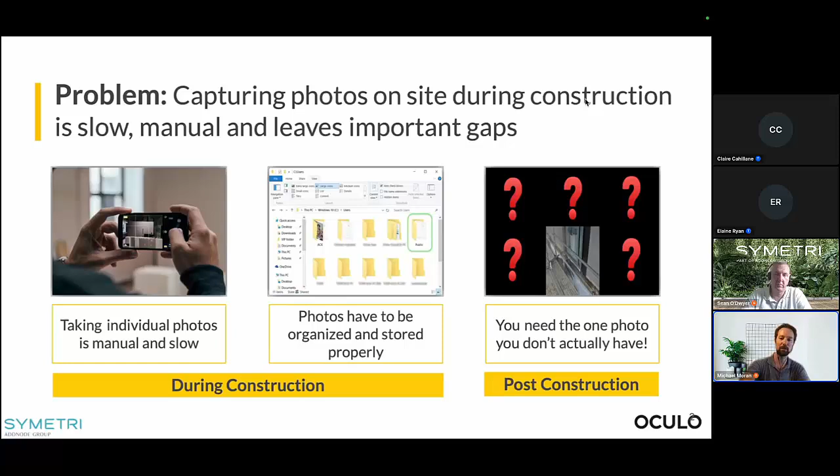So what is Oculo? It's a very, very simple solution that allows you to capture 100% of your site visually. As a result of that, you can do all sorts of things in terms of analyzing progress, comparing to models, comparing past scenes with the current, and really getting an up-to-date, accurate view of what's happening on your construction site at any particular time. There are 3 steps to the process.

As I said, very simple. Step 1 is you take a 360 camera, mount it to a helmet or on the end of a selfie stick, and press record. Start the video, walk the site as you would normally when doing an inspection. You can walk on all levels, all floors, all areas. With a single recording, you capture the entire site. You upload that video recording into Oculo, and we do the rest.

So we're using AI to process the video recording in full 3D coordinates and map that against your floor plans or your models, and we recreate the walk in 3D. It's essentially like a Google Street View for your construction site, for every day that you walk. The result is full 360 coverage that allows you to really easily pull up a floor plan and jump into a view of any area at any given time.

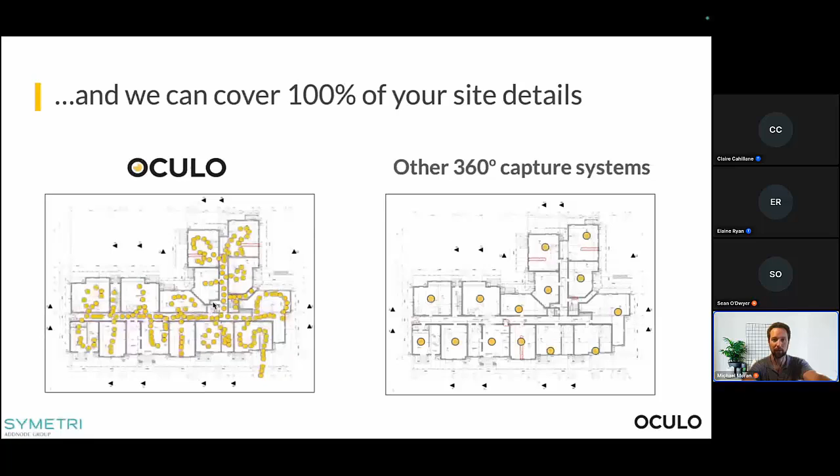The result of that is that we capture 100% of where you walk on site. There are other reality capture systems that involve setting up a camera, tripod, or scanner at various points and then registering where you were at that time. With Oculo, that goes away, and you have step-by-step for every level and every area of the project.

And the results of this are, and we'll go into this in more detail after a live demonstration, a full visual history of your entire building, complete 360 photo evidence with no gaps, so you don't need to take hundreds of manual photos and tag them by location. Instead you have this comprehensive view of everything that was seen on site on the day that you walk.

You have the ability, if you're using 3D models on projects, to compare those against the as-built reality situation. We'll see how that looks in a moment. The result of this is saving a lot of time, costs, headaches, and reducing risk on projects.

Having that accurate view means you can accurately defend your company in the case of disputes, or even if it goes to court in the case of claims. If there are variations or change orders, you can very easily see what was happening at any given time.

You have a very objective view of progress, which means that for valuations, for example, payments to subcontractors or proving that work was done at a particular time, there's no discussion anymore. You can just go and see exactly what was installed at a particular date.

It also means you can save on travel time, either from the site office to the site, which on a large site can be significant, or even in the case of consultants who are remotely located, or staff members in a different city or country. They can log in and see the latest information on site just by accessing a browser and viewing the latest Oculo scans.

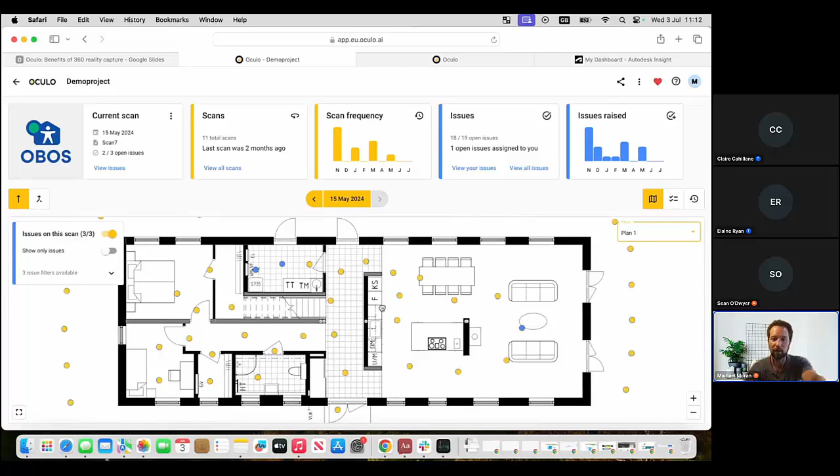So this is a landing page for a sample project in Oculo. What I see here is a floor plan view of a project, and each of these dots represents a step on the latest date that was captured. So each of these yellow dots represents where the person who did the capture walked.

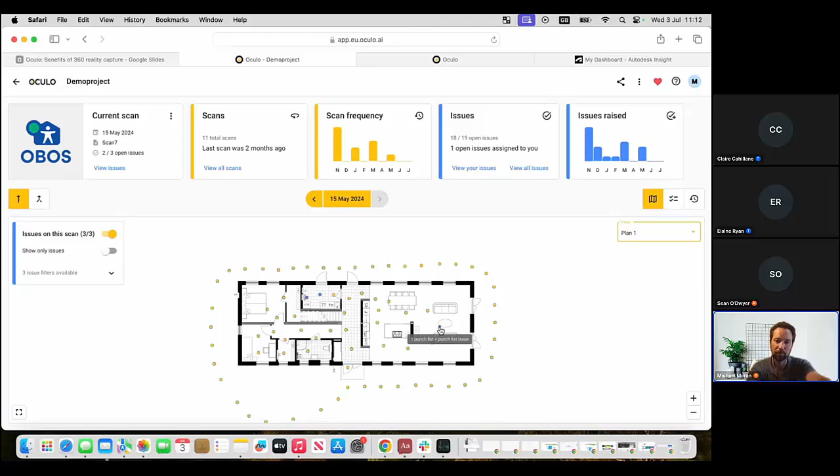They walked outside the building, they walked inside the building, they walked on multiple levels, and I can go into any of these locations and immediately get a full 360 Google Street View style capture of the project on that day.

I can easily navigate around, and I can navigate around on the little mini map here. You'll notice that anytime we recognize a person, a human figure in these scans, they're automatically blurred for privacy protection.

It's a very easy navigation and viewing process. So in addition to being very easy to do these captures out on site using the camera, it's also easy for anyone back in the office to use. There's no extra special training needed in order to use Oculo.

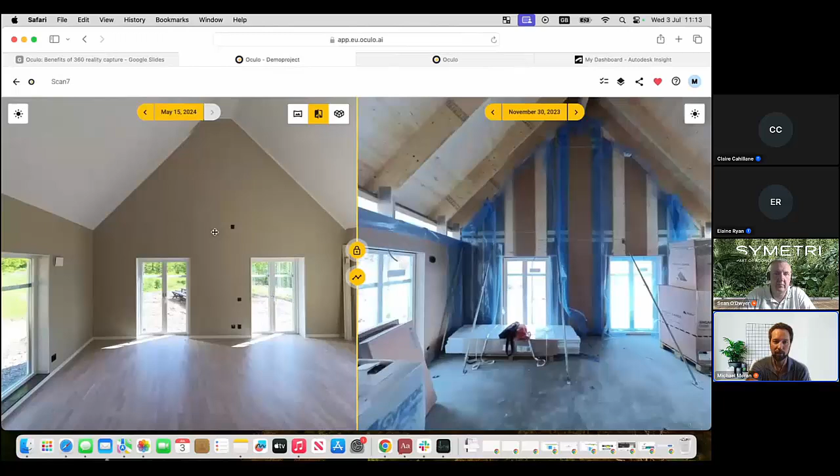As we mentioned, we have the ability to automatically locate all of these 360 scenes on a plan. What that means is that we can also automatically compare to any previous scenes that were captured at previous dates on the project.

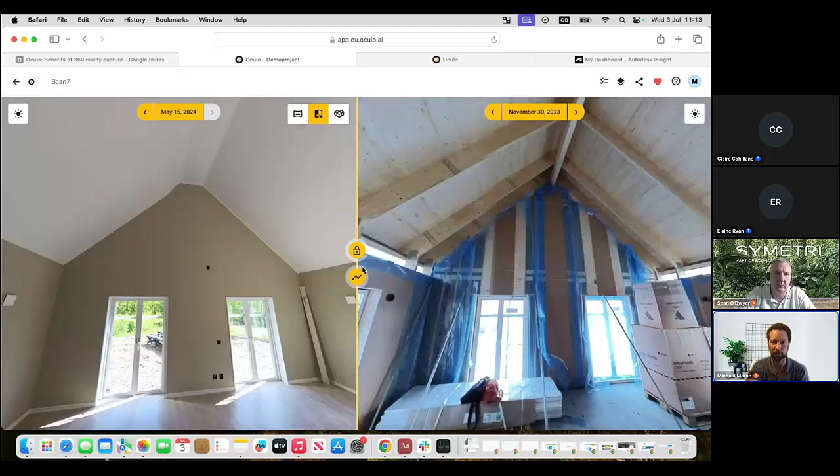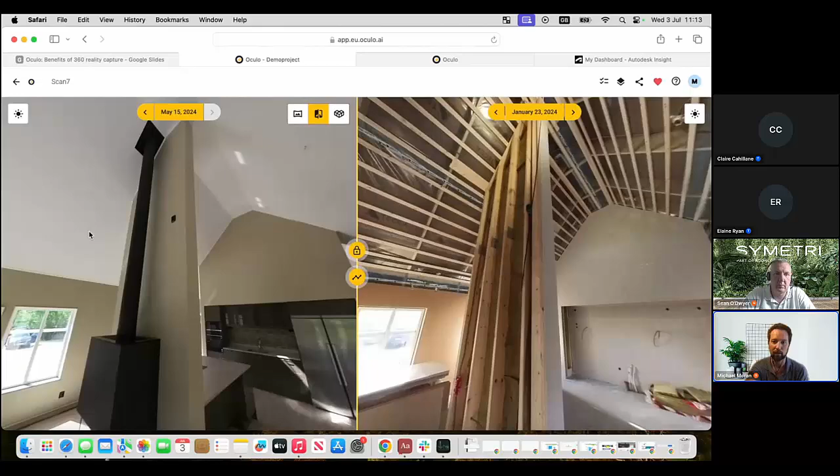So I have this full timeline showing me exactly what was happening at the project at any of these given times. On a typical project, this might be weekly or a couple times a week, and I can peel back these layers and see exactly the status of the work that was being done at this location at that time.

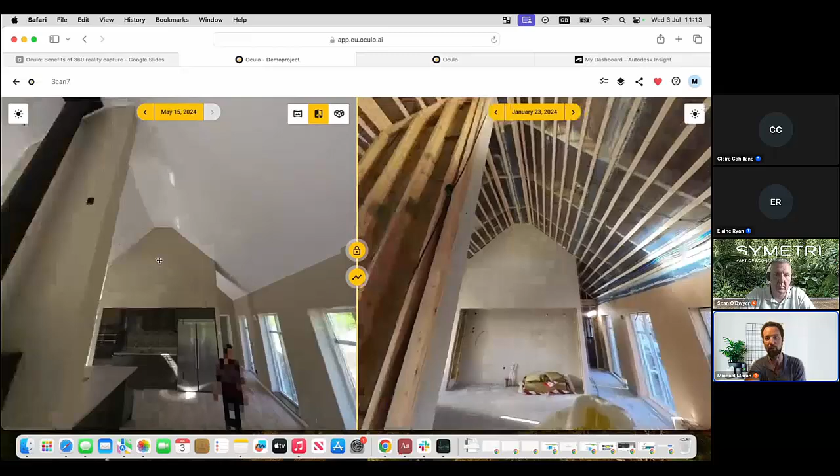And it's going to move in and keep me locked on that position. So I can look behind walls, I can verify what work was done, and you very easily see conditions at that time.

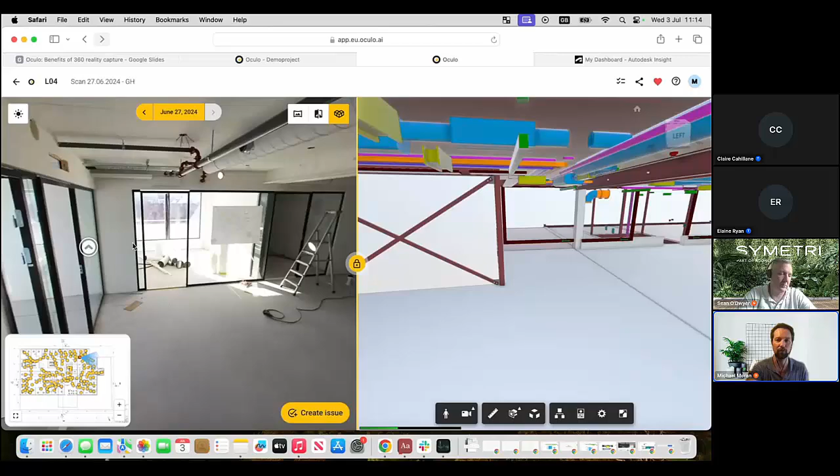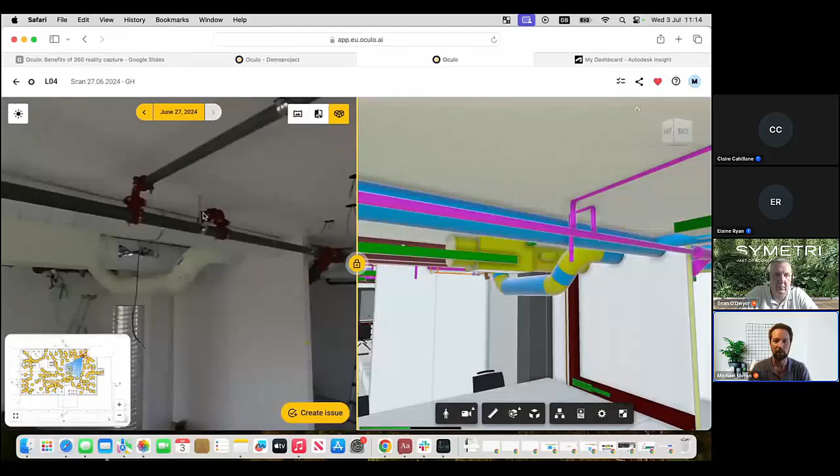As mentioned, we don't require a 3D model in order to use Oculo, but if you do have a 3D model, you have the ability to also compare all of these positions in your 360 as-built view against the latest design model. We embed the Autodesk viewer here, which allows us to very easily compare the as-built reality versus the design.

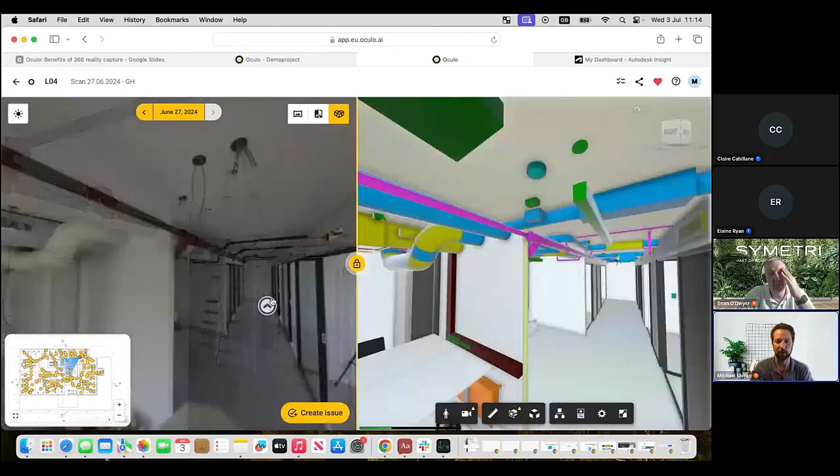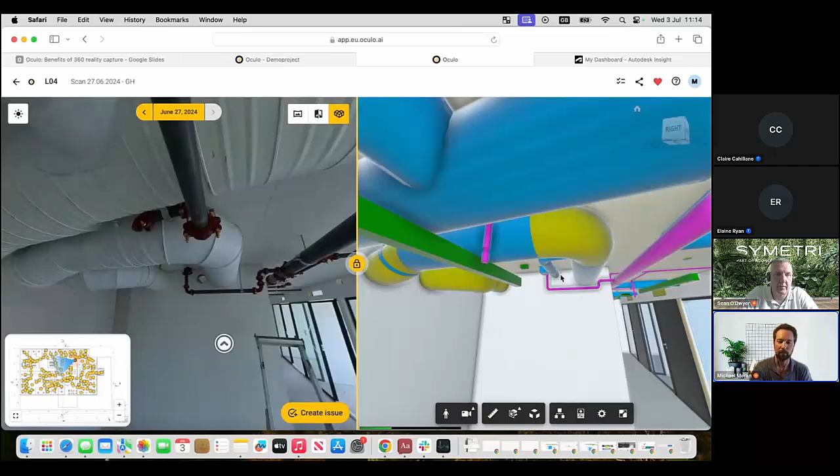Many people say this is the easiest way to give the full team access to the latest model information. You'll see that it moves and updates as I move through the space in 3D or in 360. And because this is the Autodesk viewer, I can select objects here.

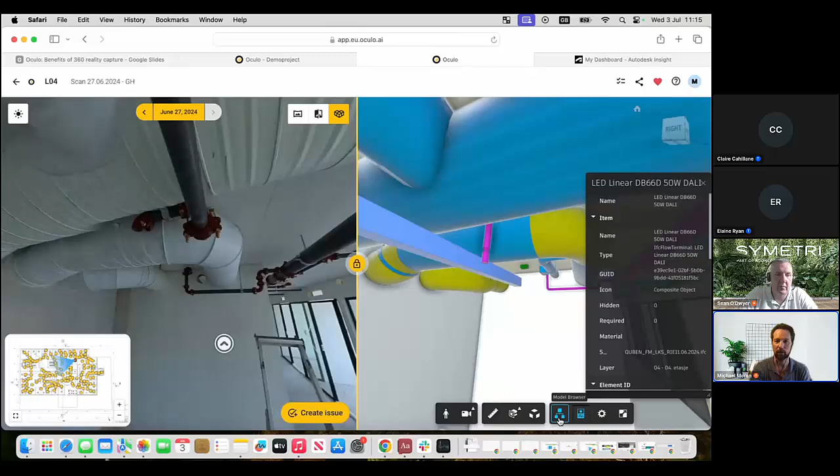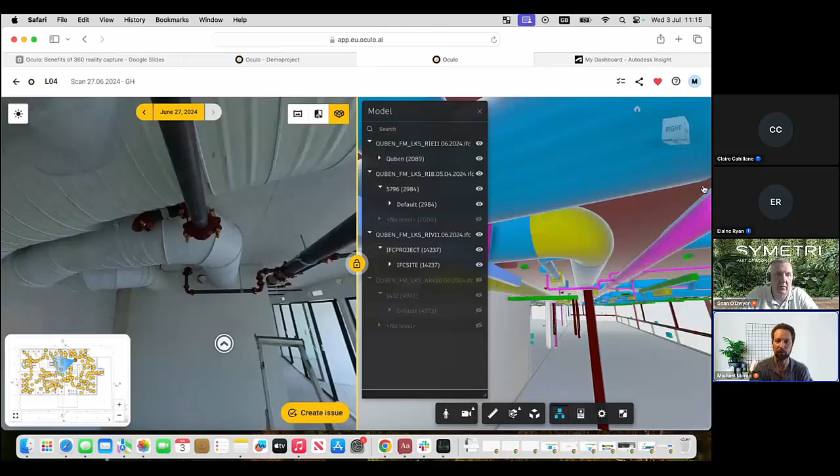I can choose to view their properties, and I can federate together multiple models in here. This also allows me to hide certain discipline models if I want to. So for example, if I want to turn off the architecture model, hide walls, and look behind walls to see only the installations in the structure, I can do that very easily.

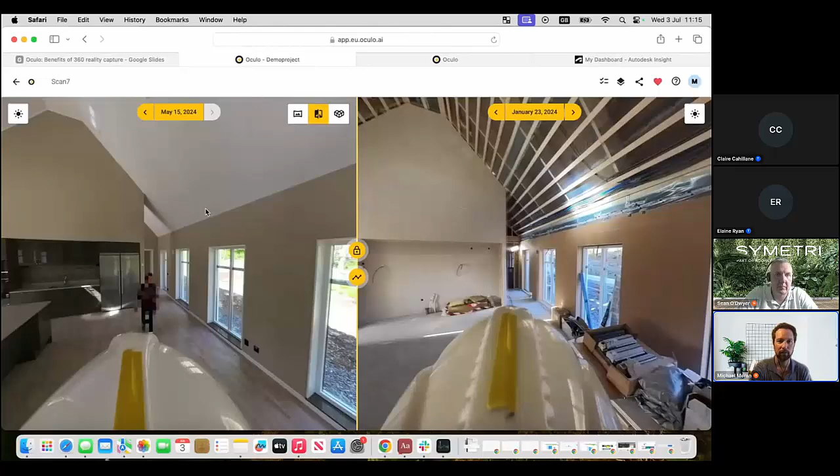Okay, a couple other things that we can look at here. As we are walking around doing the scan, as we mentioned, everything is 100% passive. So everything is being recorded automatically and being mapped against the correct location as I go through in the 360 space.

But if I need to take a detailed photo of something or create a note when I'm out on site, this might be documenting an issue, health and safety issue, quality issue, some defects or snags, but it might also be when I need to take a high resolution photo of a certificate or something out on site. I can complement the 360 capture by pulling out my phone. So he's actually taken out his phone here.

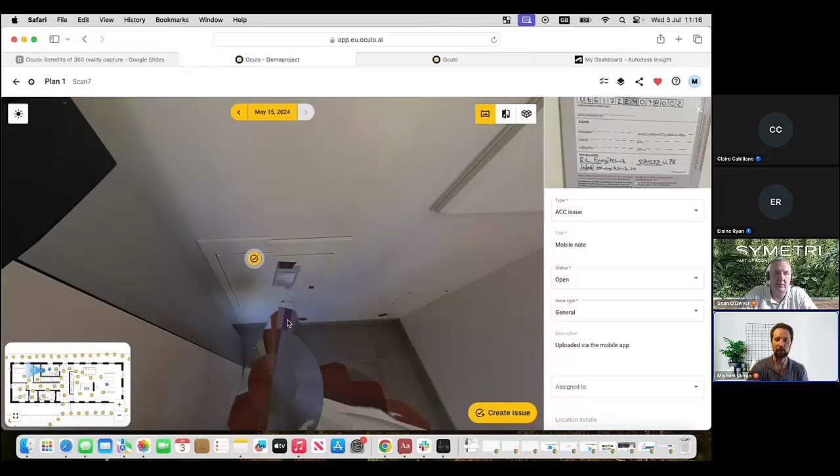It's blurred because it's recognizing that it's part of his arm. I take a high resolution photo that automatically gets pinned on the 360 scan. It's also shown here in blue on the plan. And this will be located, and I can then see this high resolution photo here.

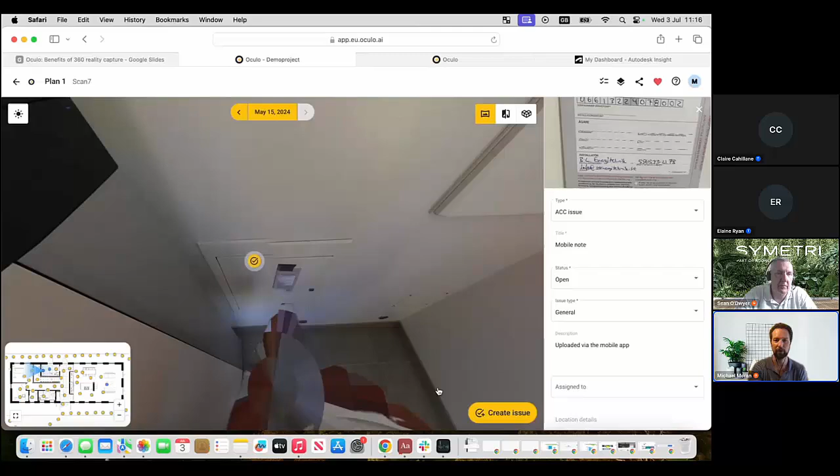And this can be tracked as an issue. These issues can be kept in Oculo and managed in Oculo, but if you are using Autodesk Construction Cloud, ACC, or the older version of BIM 360, we can push all of these issues directly into ACC as well. And then fill out any of the properties, including the status, who this issue needs to be assigned to, things like due date, root causes, and any other custom properties that you want. And you'll see that there's then always a link back to ACC here.

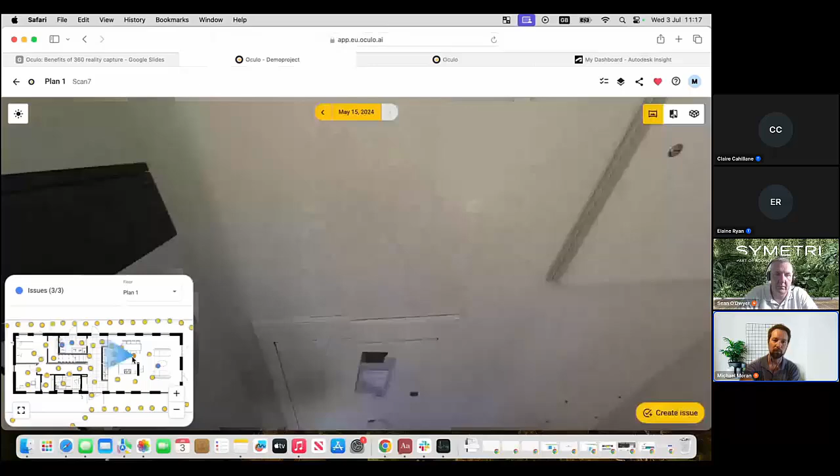The other way that I can create issues would be if I'm looking at a scan of a previous date and I notice that there is something that needs to be brought to someone's attention or documented here, I can screenshot an area. This screenshotted photo will be attached to the issue. I can then fill out the details here, fill out a description. Give it a status, and then the type.

And as soon as I create this issue, it's going to be pushed into my project in ACC and managed there. So you don't need to use ACC in order to use Oculo, but if you do already use the Autodesk Construction Cloud, then we have this nice integration with it. And the result is that if I then go into a project in ACC.

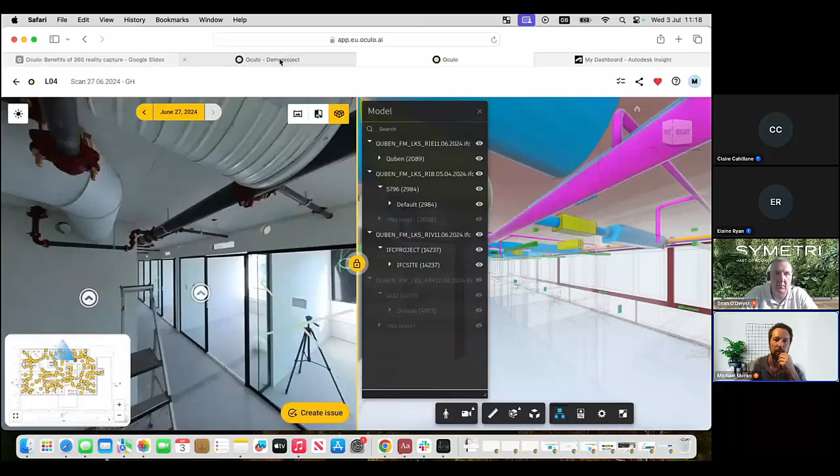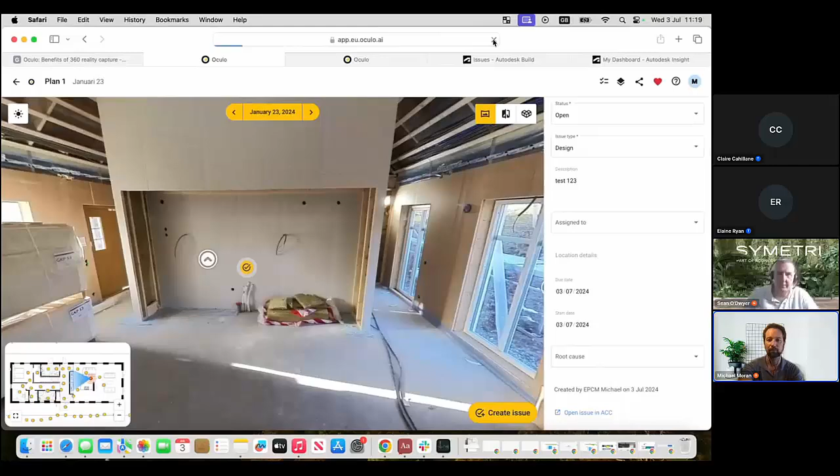And the last thing that I should say about this integration is that we also have a full integration with the single sign-on in ACC, in Autodesk. So you can also manage user permissions via the ACC integration to give people access to Oculo.

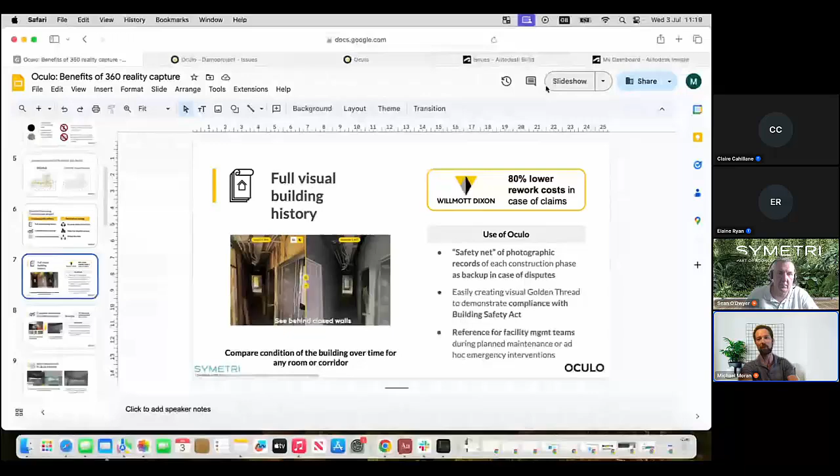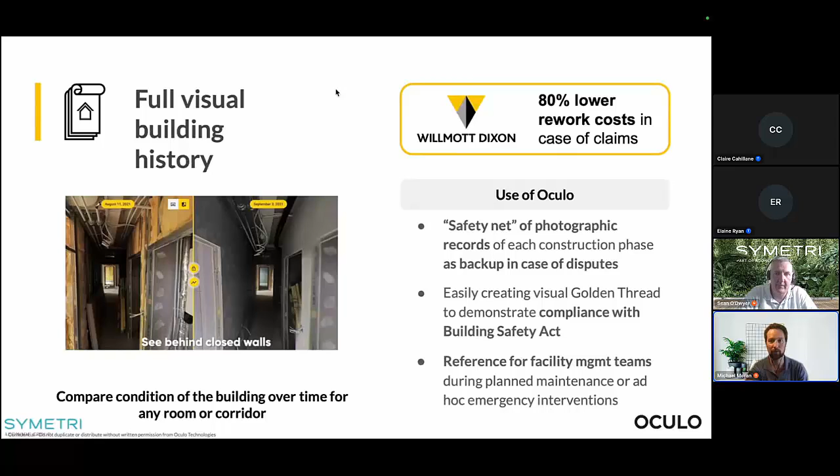Good. Okay, so just a little bit more, having seen that demonstration about the benefits of Oculo and how those can translate into real cost and time savings. As a result of having that full visual history, if you ever needed to do investigative work, if there was ever a claim or a warranty defect on a project, you're able to really document everything that was installed and go back and identify issues without having to remove walls, without having to open up areas that were already closed. And one of the results of this is far lower rework costs in the event of claims.

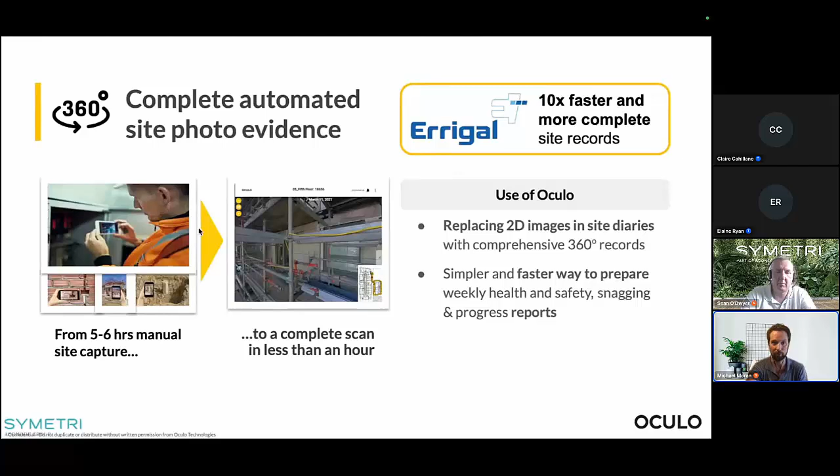Having this ability to do 360 capture of the comprehensive site evidence means that you can be much more efficient in documenting site conditions. So whoever's job it is to go out and document the site conditions can just walk the site rather than having to stop and take manual photos and then report on those. This can be up to 10 times faster to capture these records.

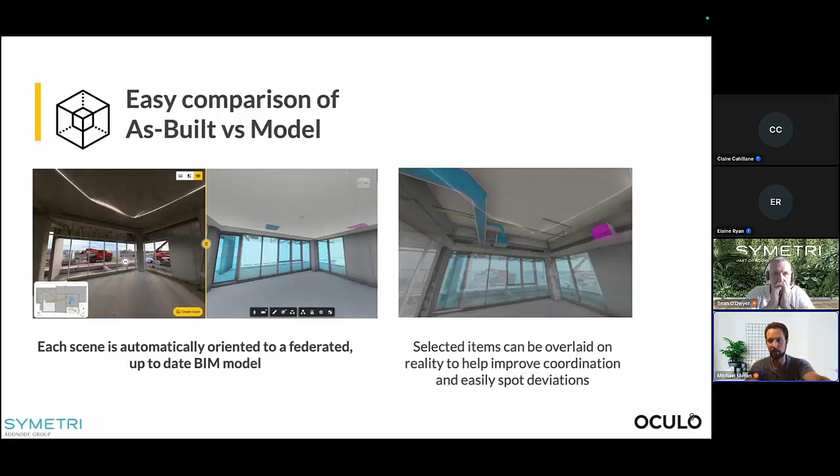The fact that we can use the model comparison means that it's very easy to coordinate future works and activities between trades and subcontractors out on site, particularly if there's complex technical installations. It's also very easy to visually identify deviations out on site. And we also have a new feature that allows you to overlay the model and the reality and then verify very easily, are the openings in the right place for the MEP penetrations.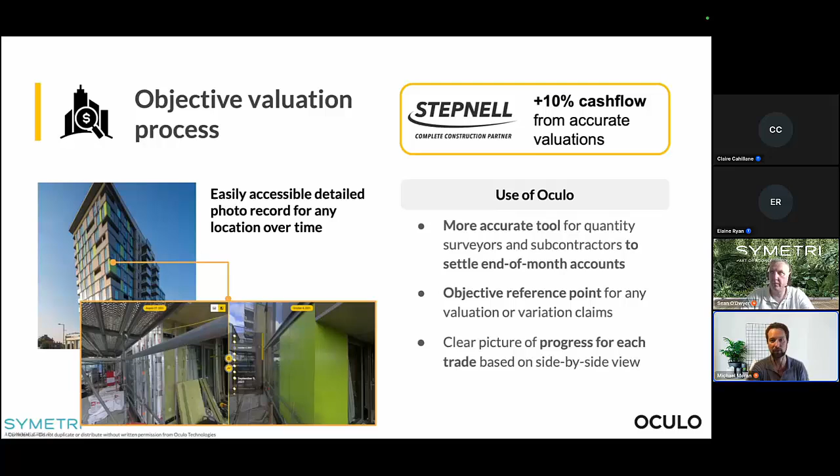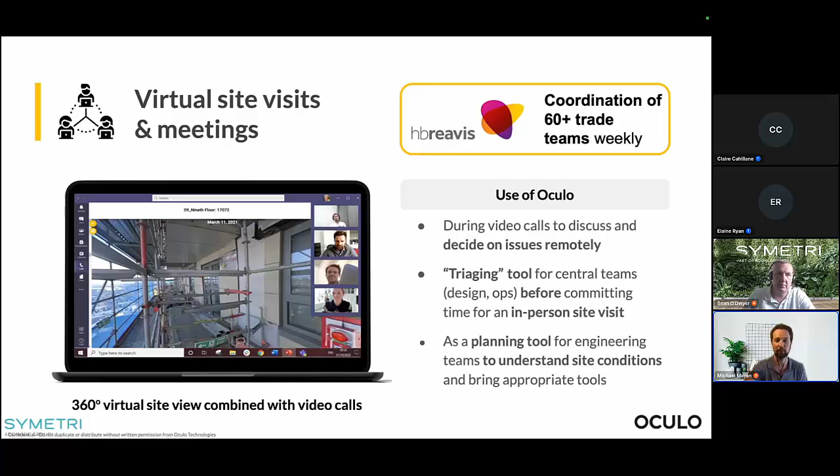So they can use this to make more accurate valuations and payments. The fact that you have this virtually documented site means that either for remote meetings, where you give the full team or members access to the site to make informed decisions, or for regular site meetings when coordinating between subcontractors in the office, you have much more accurate visual information and are able to do better coordination and avoid issues out on site as a result of not having the right information.

This is another very important benefit. All of these claims and testimonials and stories have been documented in a number of case studies that we have, that we'd be happy to share with you after this webinar.

And I think at that stage, that's everything that I wanted to talk to you about today in my prepared remarks and presentation. So I think I can hand it back to you, Sean.

Is there something you could show about reporting on it? The reports are pretty in-depth as well, where you'll have the photograph, even though it's independent of the ACC, you can run reports seamlessly on this. Yes, you can.

So here's an example of that report. We've got this list of issues here, which I can filter and sort, and I can see that some of these have been pushed into ACC if they have this little logo here. Some of them are just Oculo issues. I can filter this out by status, to show open items captured on a particular date and of a particular type.

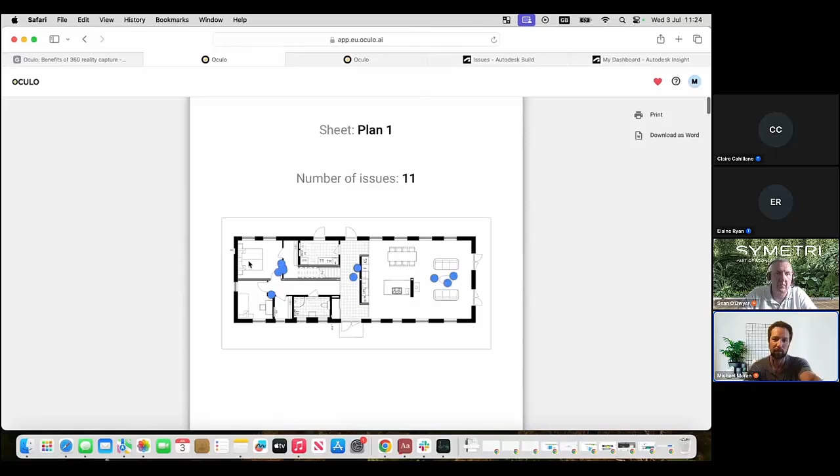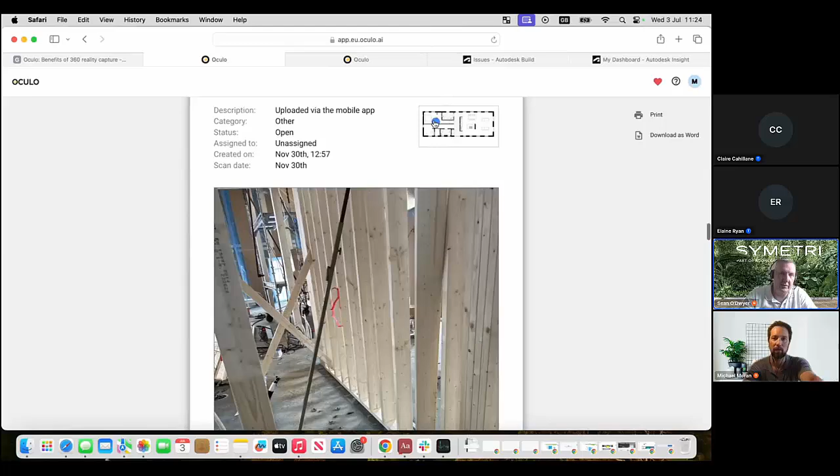Exactly. So it makes for a very easy reporting process, and you can share that out with the extended team. This would be very beneficial for dilapidation surveys, if people have a site they need to walk around to check for defects or cracks and take a photograph that's recorded. It'd also be good for O&M, if people wanted operational maintenance documentation - they could go around with this and run a report.

It's stored in the Oculo interface, but you have a nice PDF presentation that will document everything down to certificates. You could even link to other areas of scheduled maintenance reports as well - just a nice seamless approach.

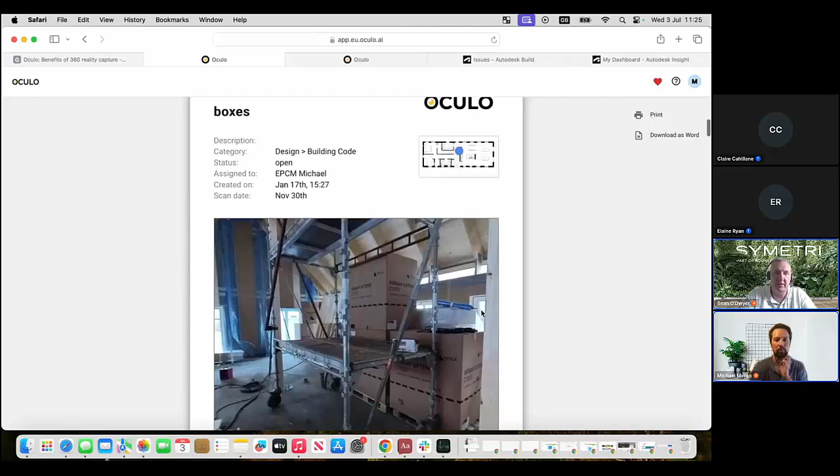I've shown you today the basics of Oculo as it's used today and over the past years as we've developed it. Of course, we're a growing company, and we have quite an ambitious product development roadmap. I can show you right now something that's in preview.